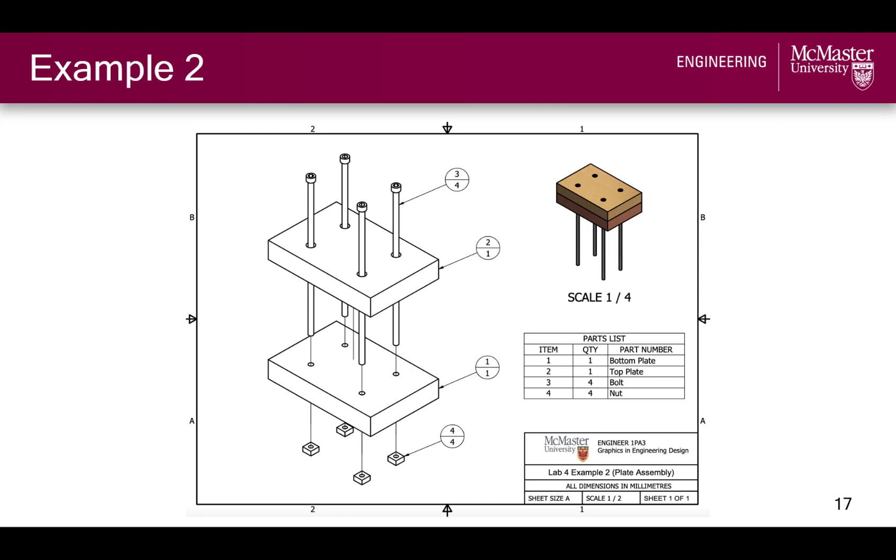In this video we'll be making example 2 of the plate assembly from lab lesson 4A, which consists of a top plate and a bottom plate that are fastened together by 4 pairs of nuts and bolts. We're going to place all of these components into an assembly file together and fully constrain everything.

I have my parts already open in Inventor, and before we even open an assembly file, I wanted to make a note of the appearance of these parts. You might have noticed that these parts have some pretty cool appearances that are different from the default gray we've seen earlier.

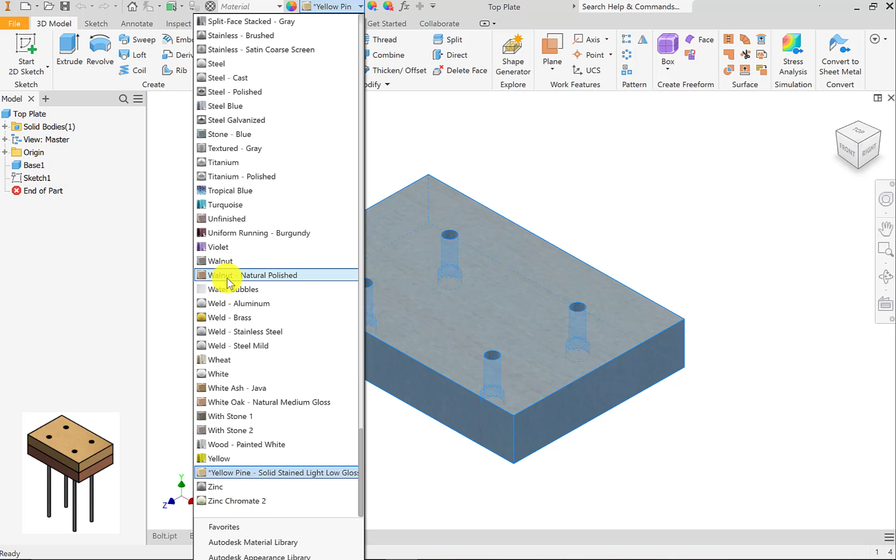This demonstrates that there is an option in Inventor to change your part's material appearance. We can do this in a part file by highlighting the part and going to the material appearance dropdown at the very top of the window. This part just happens to be a yellow pine. I believe the bottom plate is a walnut, and the nuts and bolts are one of these steel options. So this is just something to keep in mind for other projects you're working on in Inventor.

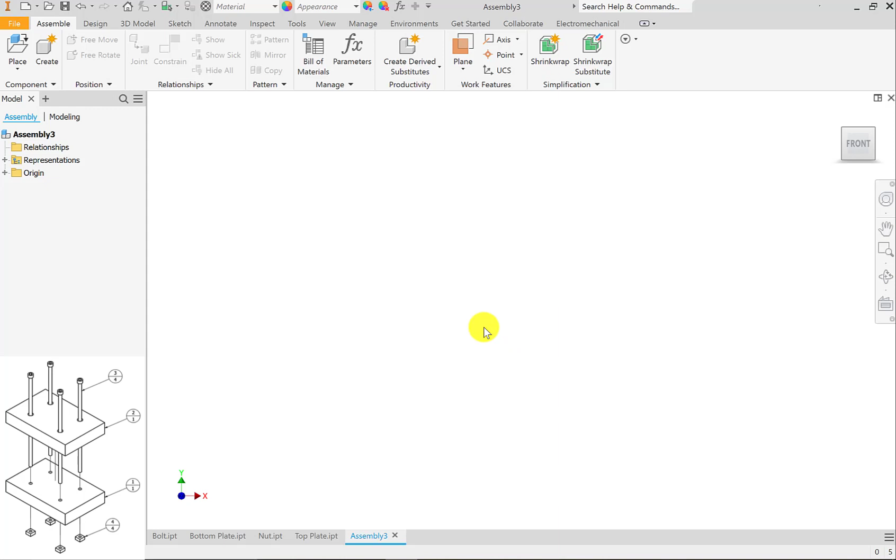So with that out of the way, let's open up a new assembly file. I'm going to open a standard millimeter assembly based off of what our drawing indicates. Once we have this assembly open, our first step is to place our base component, which I'll choose to be the bottom plate for this assembly.

I'll click the place button in the top left toolbar, and I'll select the bottom plate to open and place in our assembly file. One thing I could do is left click to place this component, then exit out of the place tool, and then ground this part because I know that this is my base component and I want to ground it to remove all of its degrees of freedom.

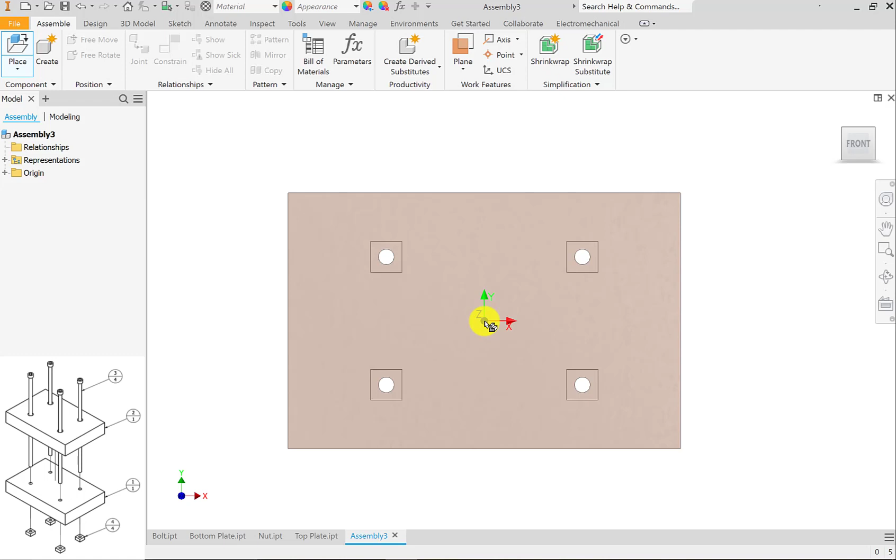Or my other option is just to right click and select place grounded at origin, and that will accomplish all those steps in one. So now I can right click and press OK to exit out of the place tool, and now we have our base component placed in our assembly.

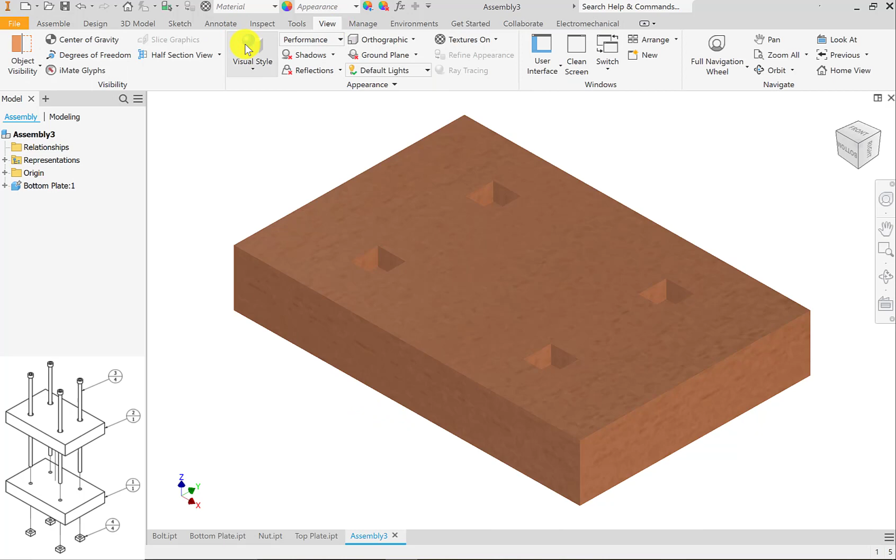I'm just going to change the view to be shaded with edges to see things a little clearer. One thing you might notice is that we have the square holes facing up after placing this part, which is the opposite of what we want. If we look at our drawing, we want the cylindrical holes at the top and these squares to be at the bottom of our bottom plate.

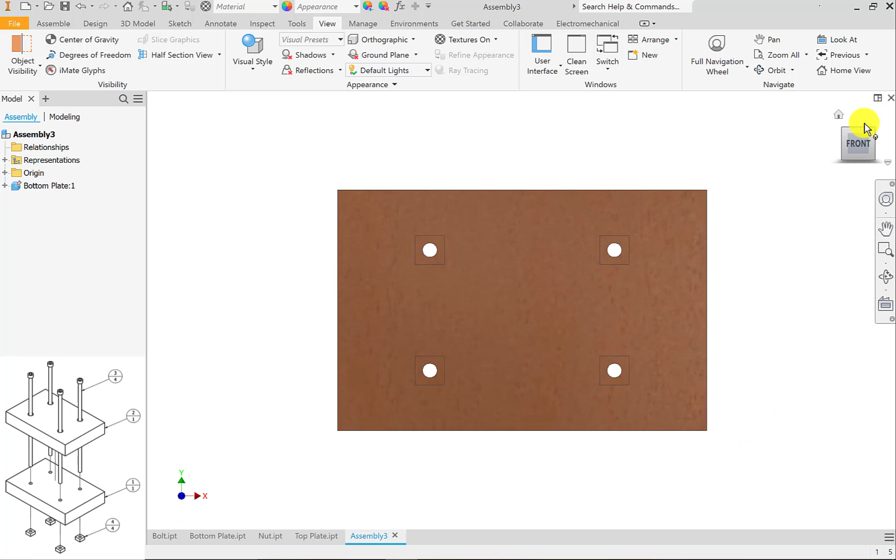So what I can do is use my view cube to change the current view. This would be my top view that I want, and this would be my front view. So I'm just going to right click on the view cube and set the current view as top. Now this updates my view cube for me.

I can also update the home view. Say I want this isometric to be my home view, then I can right click on the view cube and set the current view as home. I'll select Fit to View.

So now we have our base part placed. If we hover over it, you can see the pin icon indicating that it is a grounded part, and this shows up in our assembly browser as well. We have the little pin icon here.

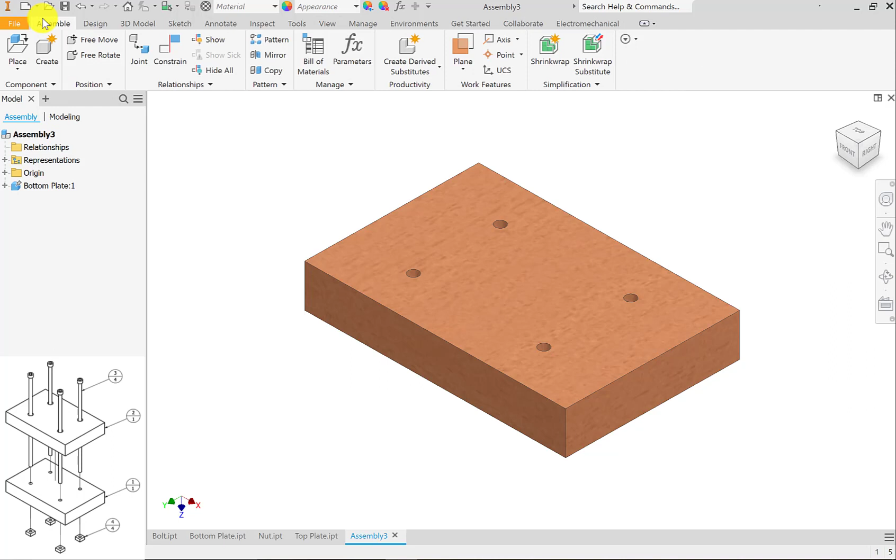So now we can go ahead and place our other components. I'll click the Place button and I'll select the top plate for placement.

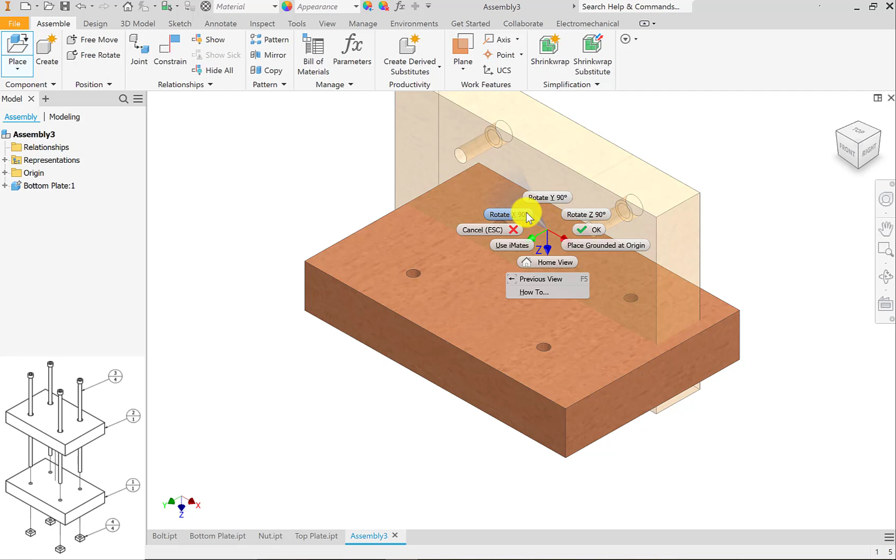Initially, it's oriented in the wrong direction. If I want to change its orientation before placing it, I can right click and select one of these rotate options to rotate it about the X, Y, or Z axis 90 degrees. In this case, I want to rotate about the X axis to get the proper orientation.

So now I can left click to place the part and I'll select OK. I'm then going to use the place button again to place our bolts.

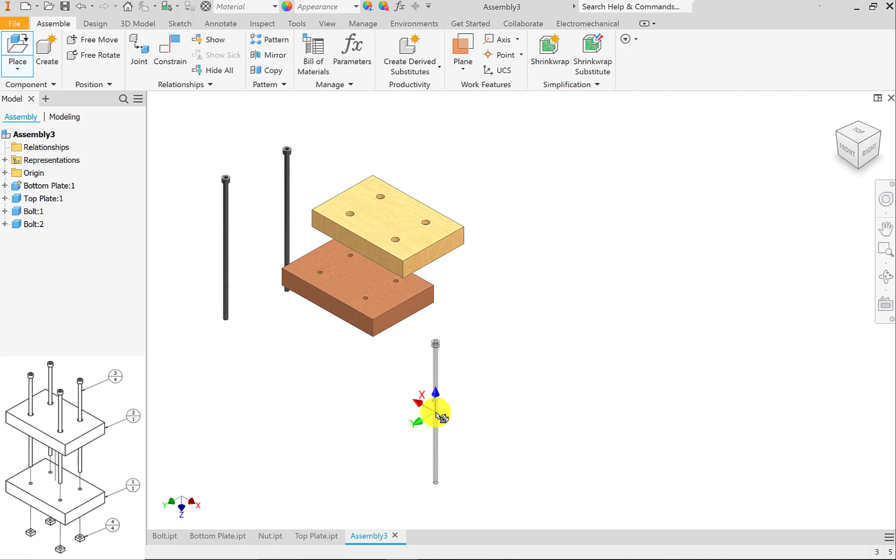And these are also upside down, so I have to rotate 2 times about the Y axis. And I'm going to place 4 instances of these bolts because I want 4 for this assembly.

Last, I have to repeat the process for the nuts. So I'm going to open the nuts for placing. I'll rotate them 90 degrees about the Y axis, and again I'll place 4 because we want 4 instances of this nut component in our assembly model.

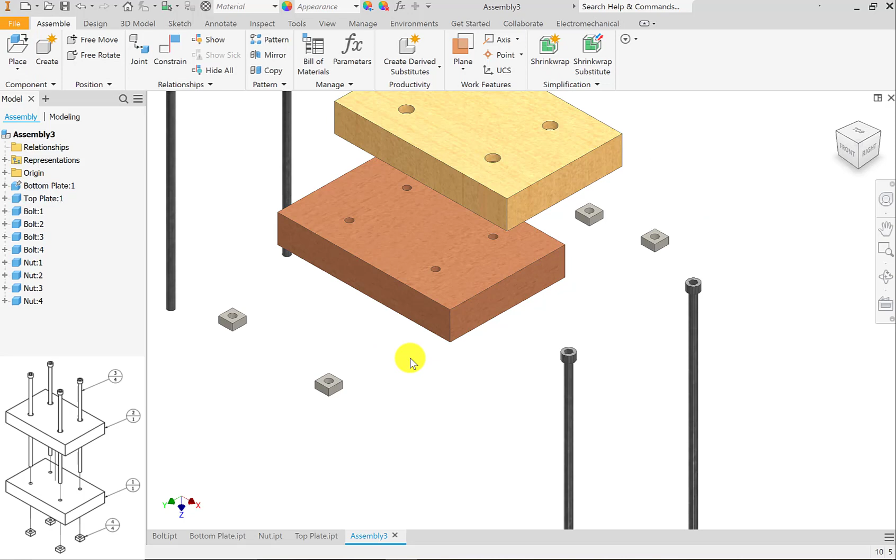So now we have all of our components placed in this file. If I go to the View tab and turn on degrees of freedom, you'll see that all of these instances have 6 degrees of freedom associated with them, the 3 translation degrees of freedom and 3 rotation degrees of freedom, except of course this bottom plate, which is grounded.

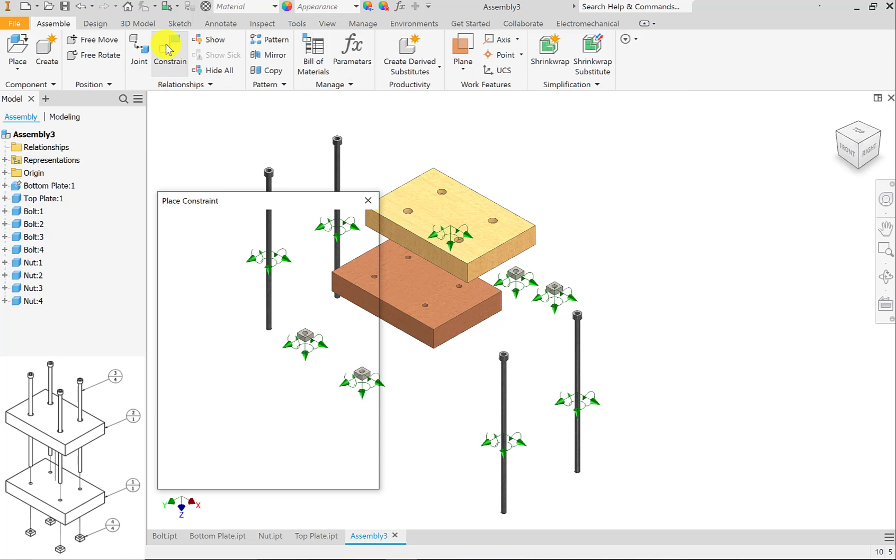So our next step will be to remove all of these degrees of freedom by applying constraints to our assembly model. So I'm going to go to the Assemble tab and access this constraint tool. There is a shortcut to use this constraint tool, just pressing C on your keyboard. So you can either press the constraint button in your toolbar or press C to bring up the constraint tool. So now we have our constraint tool open.

So the first thing I'm going to do is constrain our top plate to the bottom plate, which is our grounded part. We know that we want the bottom face of our top plate touching the top face of our bottom plate, so those two faces will be mated together. So the first constraint I'm going to apply is a mate constraint, mating the top face of the bottom plate to the bottom face of our top plate.

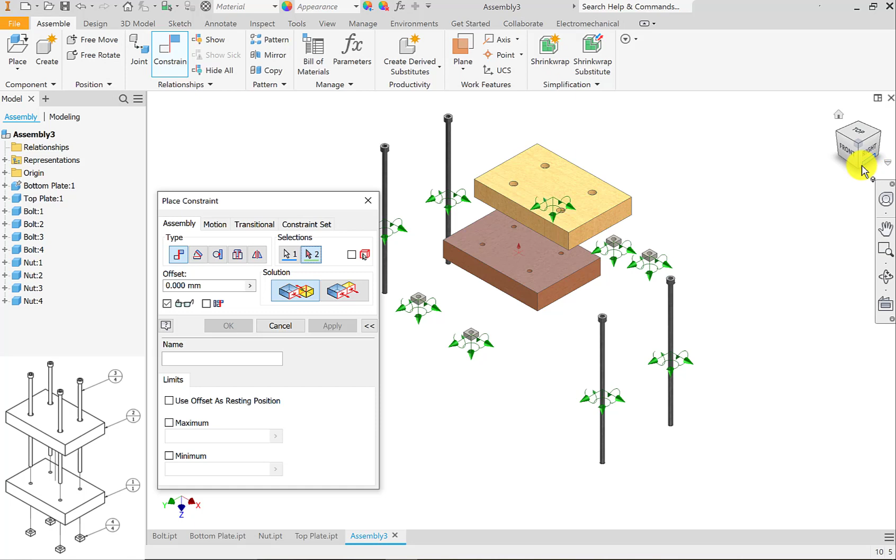So I've selected those two faces. Now I'm going to select apply. And if I just reorient myself here, we'll see that these two faces are now stuck together essentially. I can still move the top plate around. So you'll see we still have 1 rotation degree of freedom and 2 translation degrees of freedom that we need to constrain. So there's a couple options we could take to constrain these degrees of freedom.

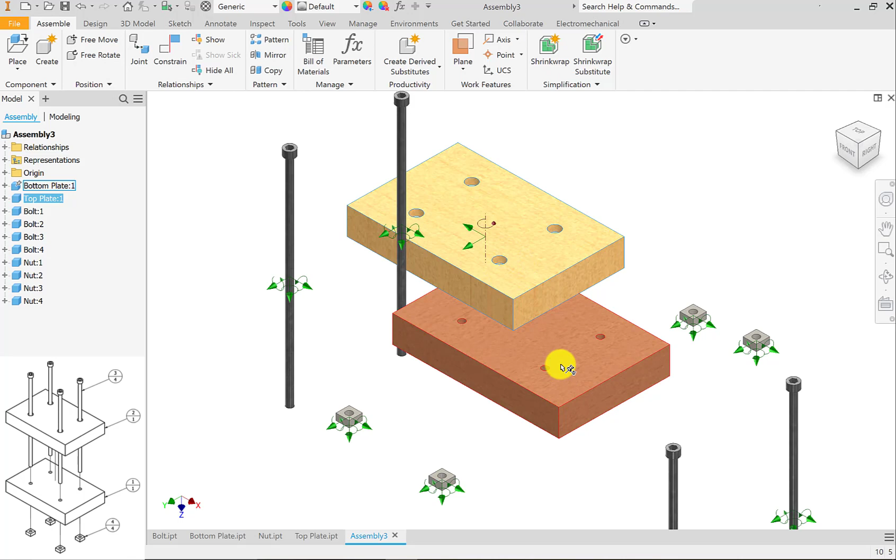We know that the holes in the top plate should be aligned with the holes in the bottom plate. So one option might be to align these axes by applying an axis-axis mate constraint. So let's bring the constraint tool back up. I'm going to press C on my keyboard to bring it up. And I'm going to select the axis of one of the holes on the top plate and the corresponding axis of the hole on the bottom plate to align those two together.

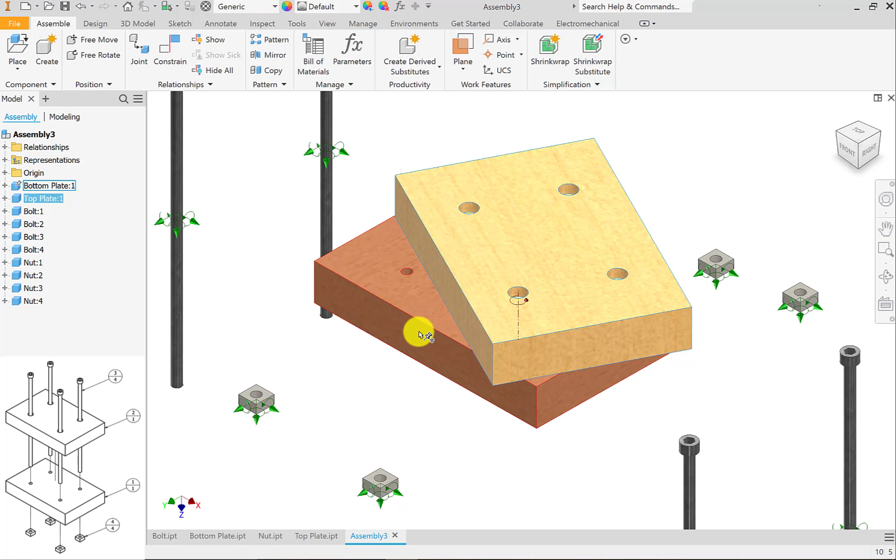So if I exit out of the constraint tool and I just drag this top plate around, you'll see that it still has 1 degree of freedom remaining, which is this rotation degree of freedom that we need to constrain. So we could apply the same axis-axis mate constraint to one of the other holes in our top and bottom plate. Or another option would be to align one of the side faces of our top plate with the corresponding side face of the bottom plate using a flush constraint. So I'll try that next.

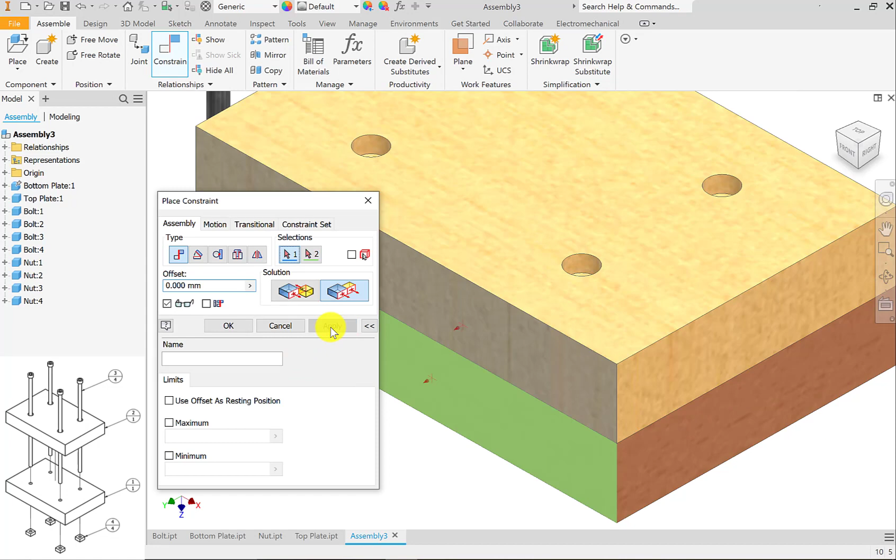So this flush constraint is one of the options of the mate constraint. It's this second solution option. So I'm going to select that option, and then I'm going to select the front face of the top plate and the front face of the bottom plate and apply that constraint. And now our top plate is fully constrained. We can't move it around, and there's no arrows indicating any degrees of freedom remaining.

So now we can move on to another part in our assembly, such as the bolts. So we know that these bolts should be aligned in the holes of the top and bottom plate, and we want the heads of the bolts to sit in the counterbore holes from the top plate.

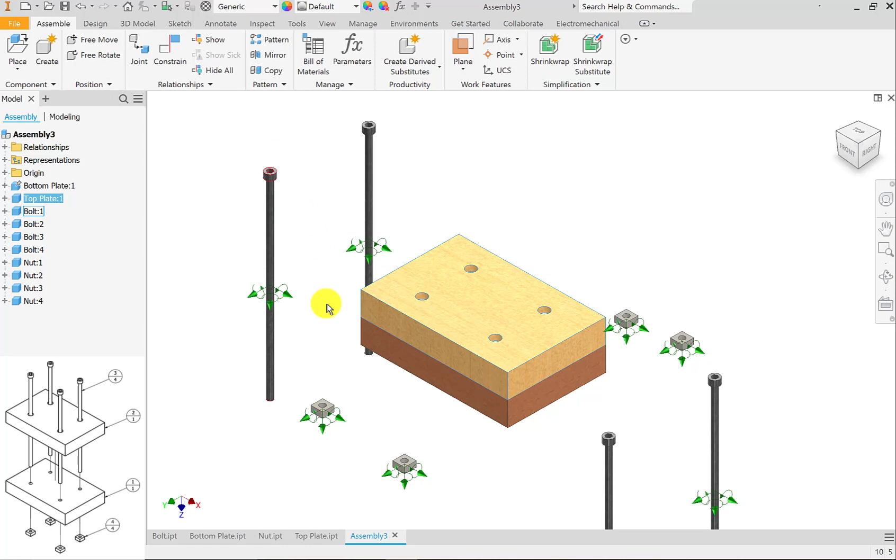So if we want these bolts to be aligned in the holes, the first constraint that comes to mind might be an axis-axis constraint. Let's start with that. We'll apply an axis-axis constraint that aligns the axes of these back two bolts to the axes of the holes in the top plate. It might take some patience to select the axes, but there we have it. We've applied the axis-axis mate constraint to constrain these two bolts.

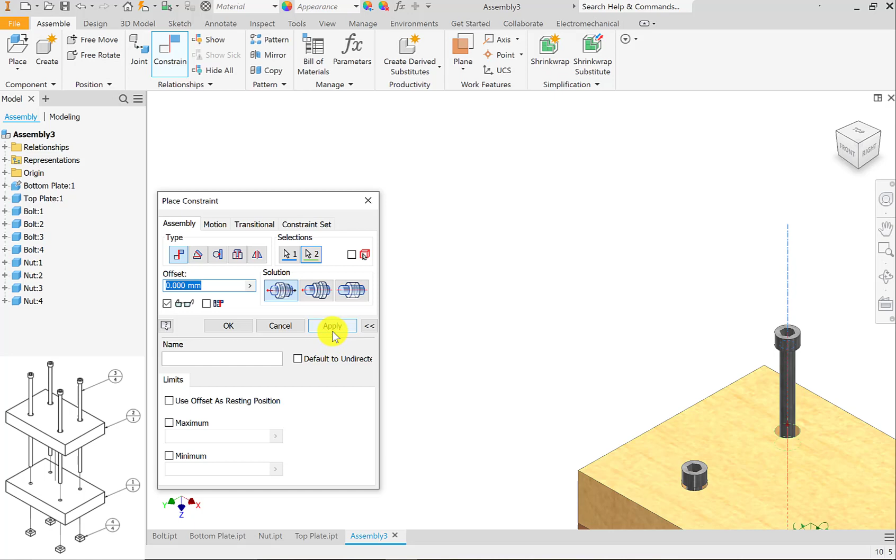You'll see that these bolts still have some degrees of freedom remaining. If we look at the arrows, which are a little hard to see, here's a good example. We still see that we have a translation degree of freedom because we can move these bolts up and down. And they also have a rotation degree of freedom, so we can rotate these bolts around.

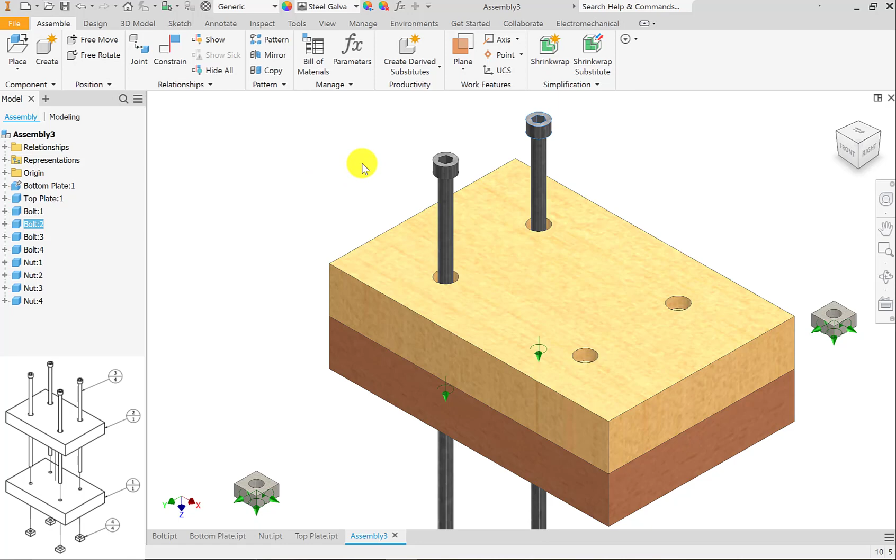Let's tackle the translation degree of freedom first. We know that we want the heads of these bolts to sit in the counterbore holes of the top plate. So what I could do is select the bottom face of the bolt head and mate it to the corresponding bottom face of the counterbore hole using a face-face mate constraint.

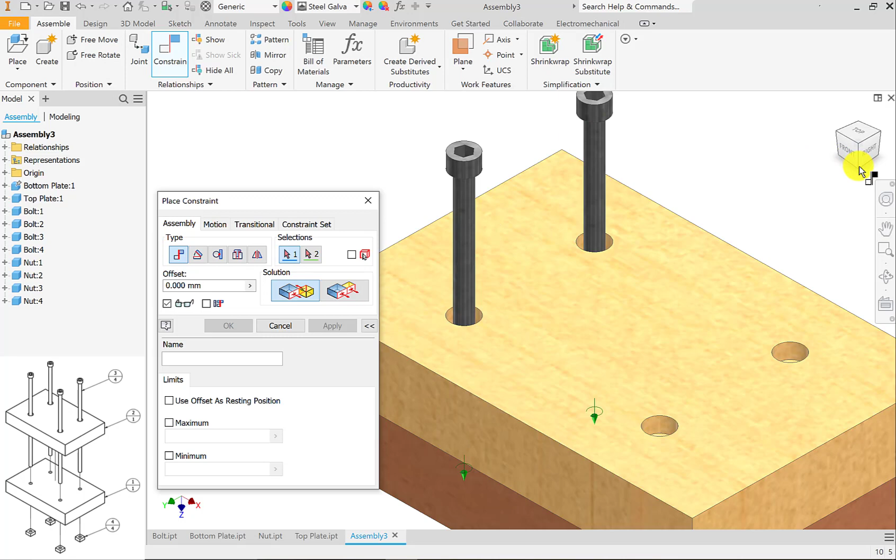So I'll reopen the constraint tool. I have the mate constraint selected, and I'm going to change my view so that I can select the bottom face of the bolt head. Now I want to select the corresponding face of our counterbore hole, which we can't see from this current isometric view that I'm in. So far I've been relying on these isometric views to place all of my constraints.

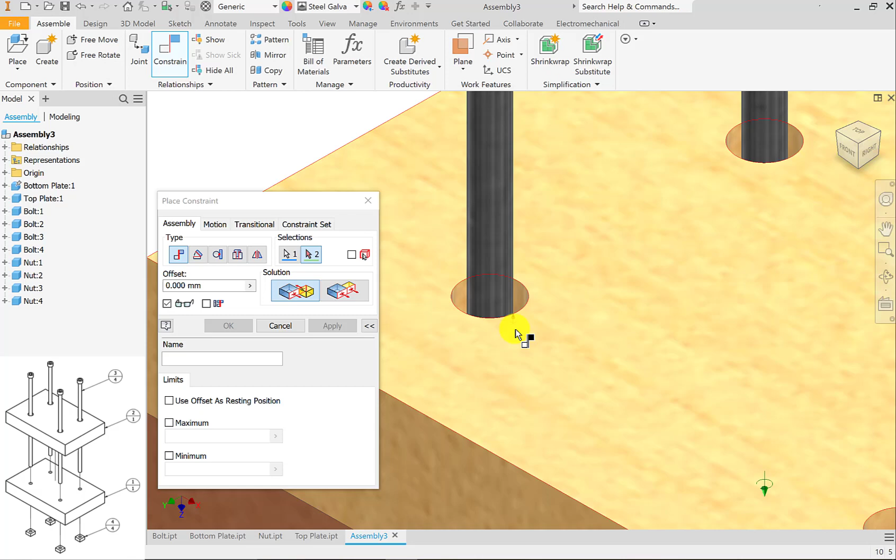In order to make sure that I'm selecting the correct face for this counterbore hole, I can use the orbit tool, either by selecting the orbit tool in the navigation pane or by holding down Shift and the scroll button on my mouse and dragging. So now I can rearrange the view and select the appropriate face to apply the constraint.

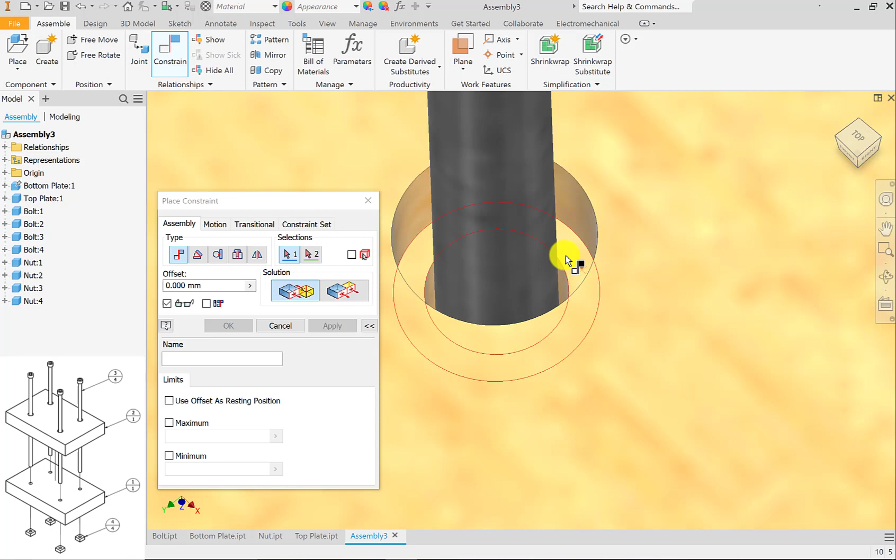Then I can do the same for the second bolt. So I'm going to mate the bottom face of our counterbore hole to the corresponding face of the bolt head and apply that. Let's go back to our home view. So now these two bolts are almost fully constrained. All that they have left is 1 degree of freedom remaining in rotation.

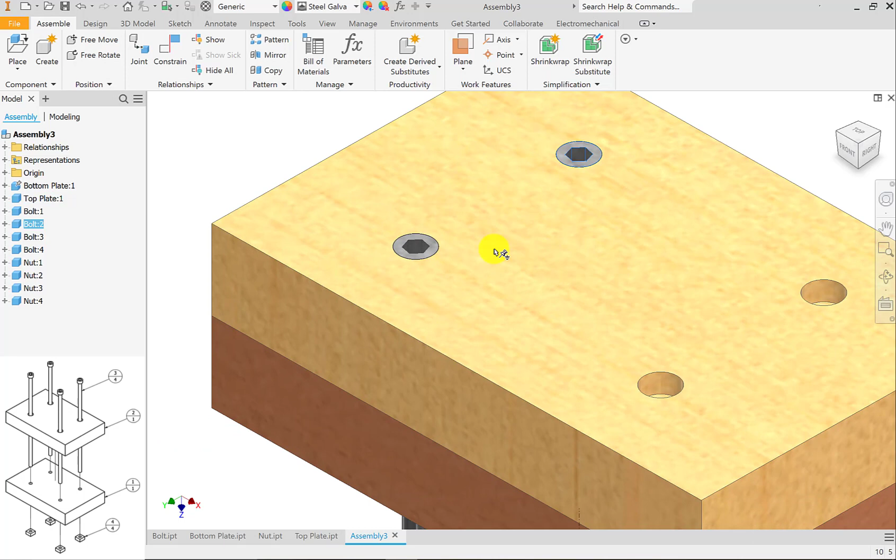So the last thing I'm going to do is apply an angle constraint to restrict the rotation of these bolts. What I can do is select one of the faces of the hexagon feature in the bolt, and align it to the front face of the top plate. I'll just use the directed angle constraint option, select apply, and now we've fully constrained this bolt.

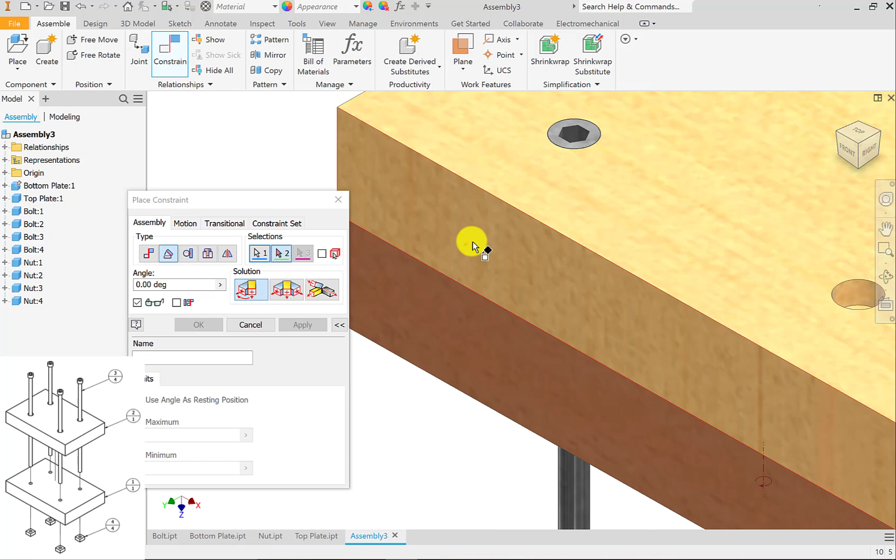I'll do the same for the back one, and apply that as well. So now these two bolts are fully constrained. If these bolts did not have these flat faces to apply the angle constraint to, we could have also gone to the origin folder for the bolt, and applied the constraint to one of the origin planes, like the XZ plane. Okay, so those two bolts are fully constrained.

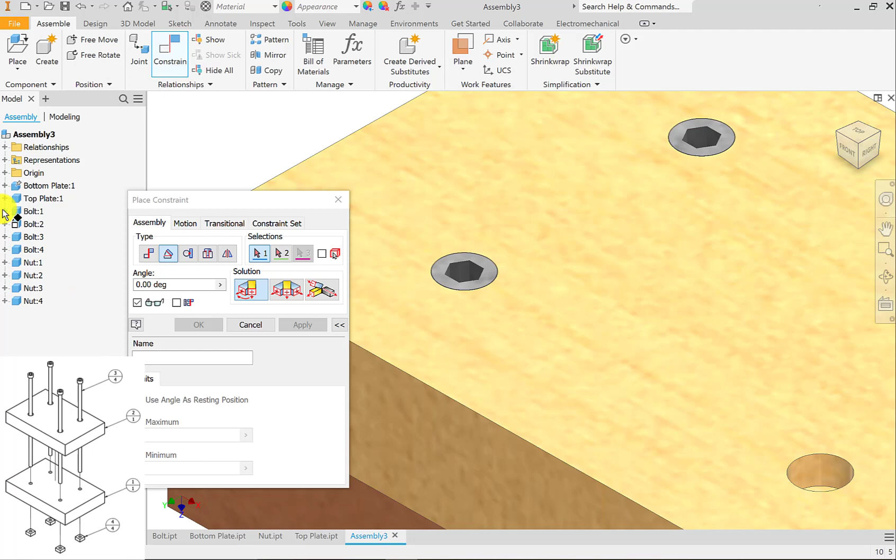We could go through the same process for the front two bolts, where we apply the axis-axis constraint, the face-face mate constraint, and finally the angle constraint to remove all of their degrees of freedom. But let's try something different instead. In fact, let's try something that's way easier. In this case, let's use the insert constraint.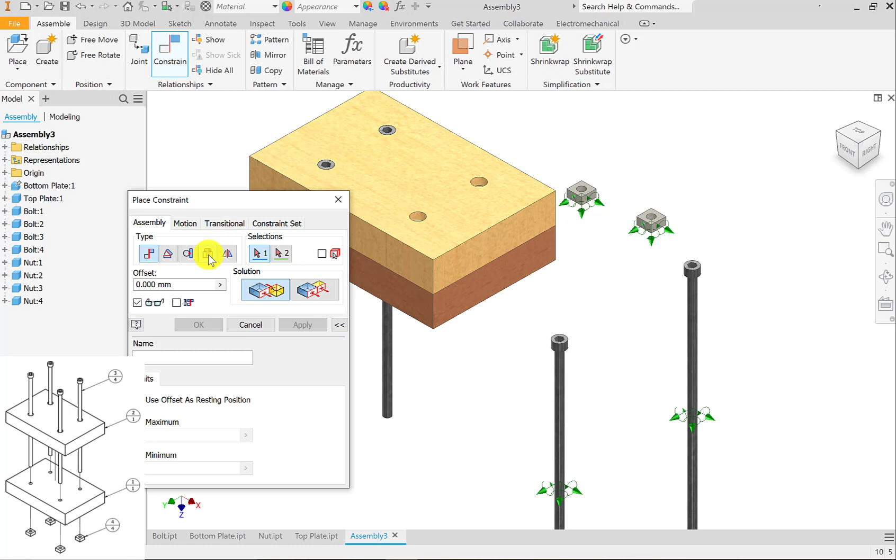So I'm going to navigate to the insert option for assembly constraints. And in this case, I'm going to select the bottom circular edge of the bolt head and the corresponding bolt axis. And I'm going to make the second selection the corresponding edge of the counterbore hole and its axis in the top plate. This will automatically insert the bolt into this hole.

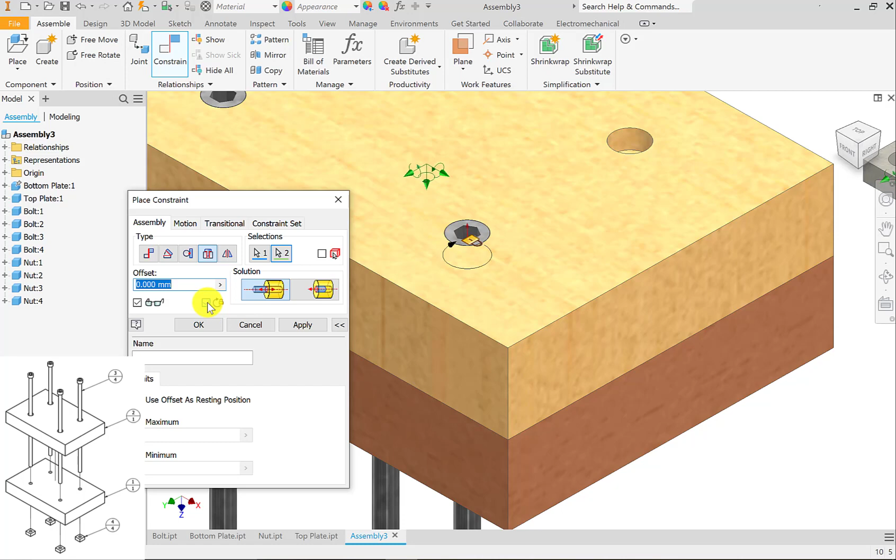You'll see that we have one other symbol show up when we apply this constraint, which is a circular arrow and a lock symbol. This is because I have this option of lock rotation checked off in my constraint. So this automatically restricts the rotation of this bolt. We don't have to apply any angle constraint to do that. So we'll apply this constraint. This bolt is now fully constrained using one constraint rather than three. And we'll apply the exact same constraint to the last bolt that we have remaining.

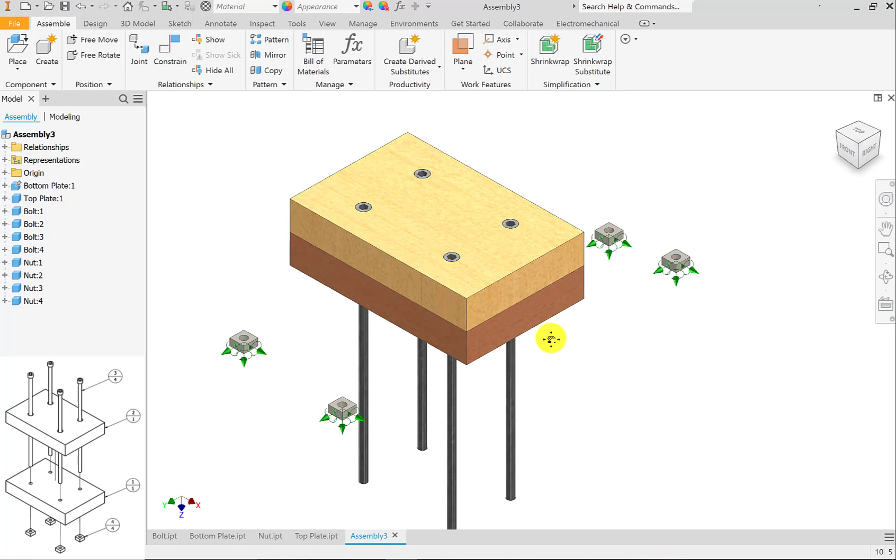So there we go. Our top plate and all four bolts are now fully constrained. Our last step will be to fully constrain the nuts that we have remaining. So let's do one, and once we figure out what we need to do, we can repeat the process on the remaining three. We know that we want these nuts to be aligned with the axis of the bolts.

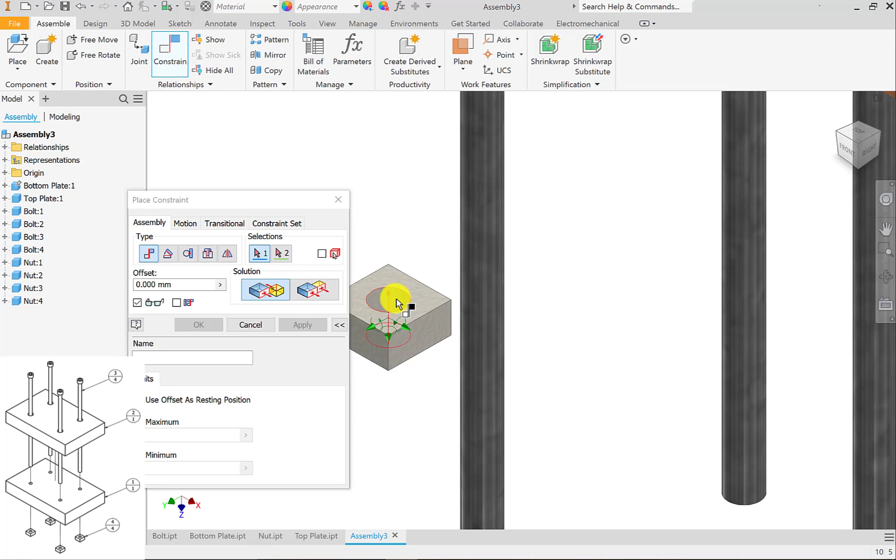So the first constraint that comes to mind is an axis-axis mate constraint. I'll open up the constraint tool once more. We're already on the mate constraint. I'm going to select the axis of the nut and the corresponding axis of the bolt, and we'll apply that constraint. That removed quite a few degrees of freedom from this nut, but you'll see that it still has the ability to rotate and translate along the bolt.

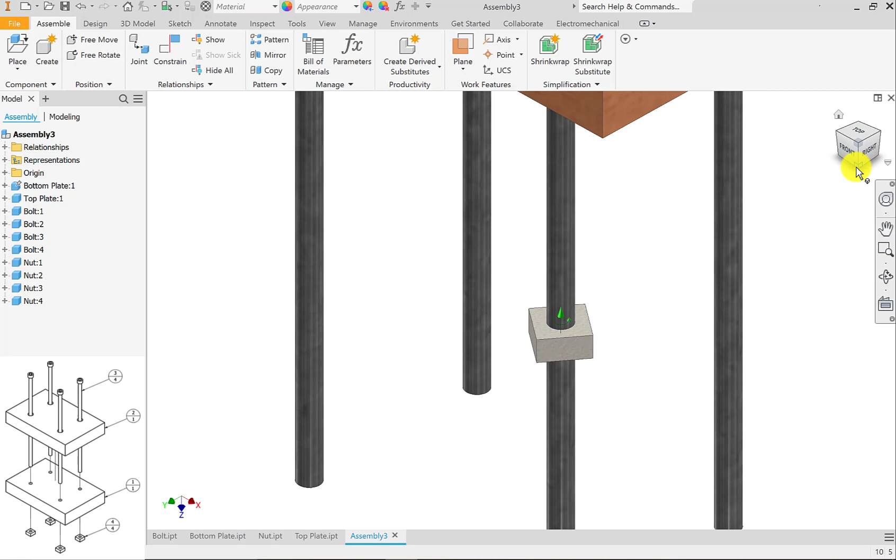So we still have to apply a few more constraints. At the end of the day, we want this nut to be placed in this square hole that we have on our bottom plate. So we know that we need to mate the faces of our nut to the faces of this bottom square hole.

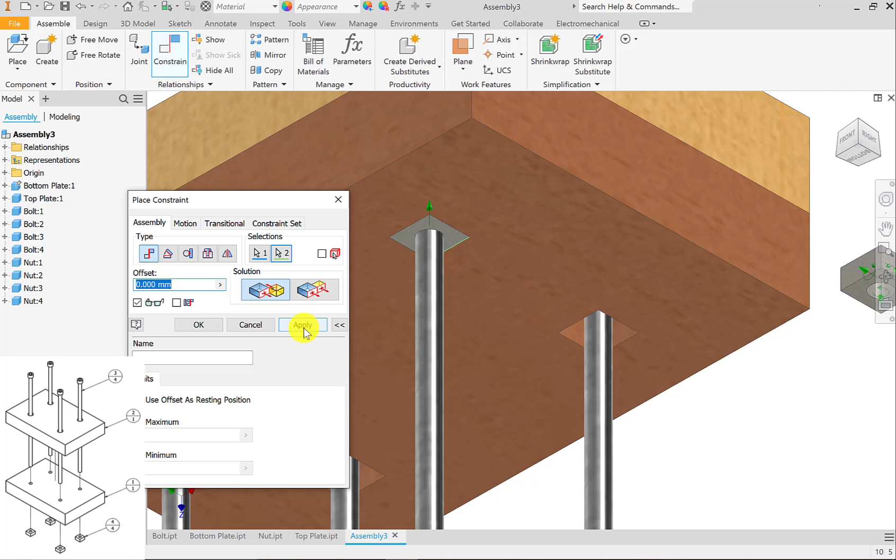Again, we'll pull up the constraint tool. We're going to use a mate constraint, and I'm going to select one of the side faces of this nut and mate it to the side face of the bottom plate. We'll apply that constraint. I'll exit out of the constraint tool for now. And if I drag this nut around, you'll see that it's still able to translate up and down. So we have one final constraint that we need to apply.

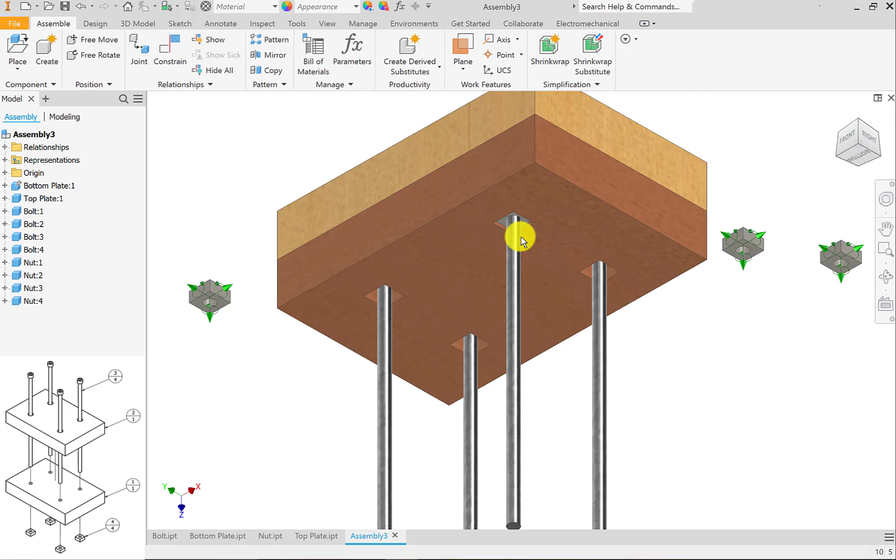And that constraint is mating the top face of our nut to the corresponding face at the top of this square hole. Again, one final time, we're going to open up the mate constraint, and I'm going to use the orbit tool to select the face of the bottom plate and then the corresponding top face of our nut. And we'll apply that constraint to fully constrain this nut. So there are no more degrees of freedom remaining. We can't see any arrows associated with this nut. We can do the exact same thing for the other three nuts.

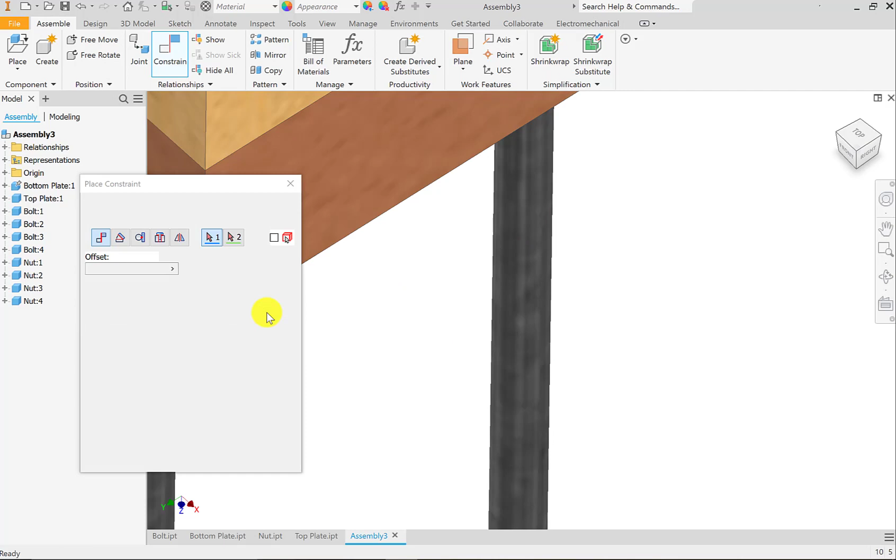Now that we've fully constrained the last 3 nuts, our assembly is complete. There are no more degrees of freedom remaining. And if we want to see all of the constraints that we've applied, we can select our entire assembly and select the Show Constraints option, and this will give a symbol for each of the constraints that we've applied. And we can see we've applied quite a few.

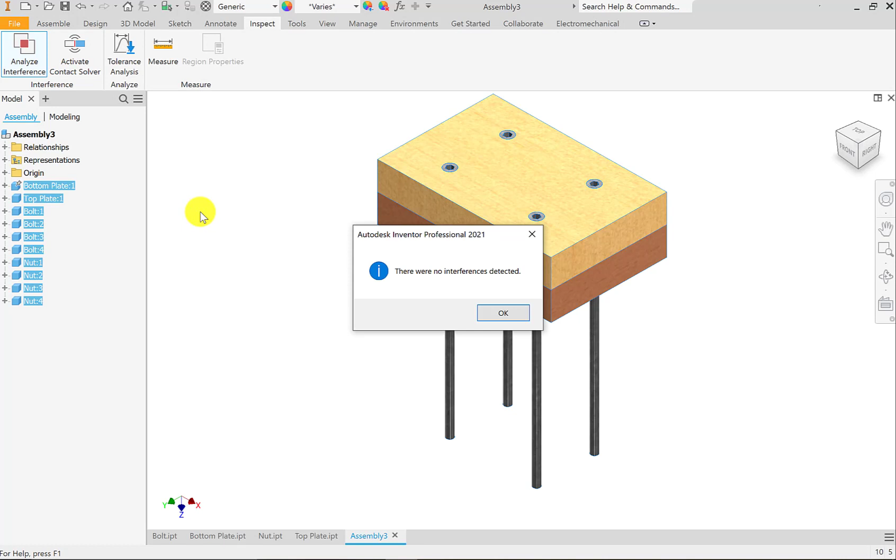For now, let's hide those constraint icons, and let's do one more thing. Let's analyze the interference of this assembly. So I've selected all of the components in my assembly. I'm going to go to the Inspect tab and select Analyze Interference. And hooray, there is no interference detected, which means all of our constraints are applied properly.

Now, if you do detect interference, that could be because of a mistake in modeling the part or a mistake in applying a constraint. And if it is a mistake in applying a constraint, you can always go back and edit or remove a constraint by going to the assembly browser and clicking the drop down for the part that the constraint is applied to. Here I've clicked the drop down on bolt 1, and we see all of the constraints applied to that bolt. If I want to, say, change the mate 3 constraint, I can right click on this constraint and I can edit it, or I could even go and delete it if I wanted to replace it with something else.

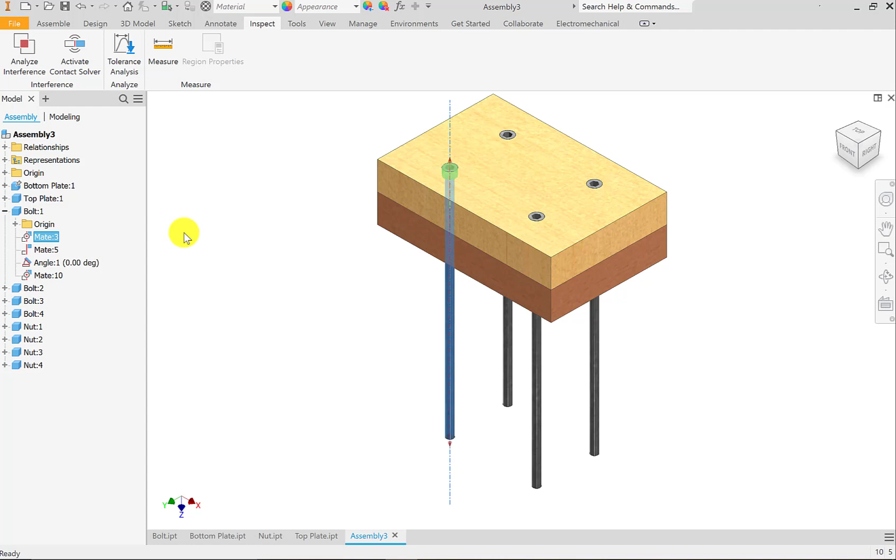This finishes off this example of assembly modeling. So now I encourage you to go ahead and try the other examples on your own.